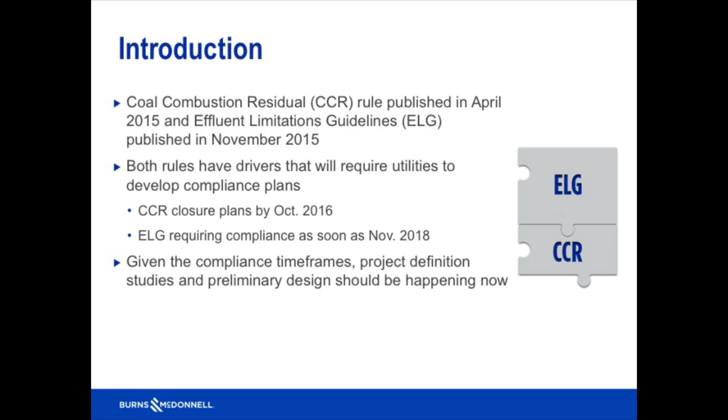The CCR rule was published in April of last year, and the ELGs were published in November of last year. Both rules have drivers that will require utilities to develop compliance plans: CCR closure plans by October of this year, and ELGs requiring compliance as soon as November of 2018. Given those compliance timeframes, project definition studies and preliminary design should be happening now, if not already started.

Just a couple quick slides on the rules. Effective January of this year, it applies to, quoting the rule, facilities where generation of electricity is the predominant source of revenue or its reason for operation. The two biggest issues, as we've touched on today, are that FGD wastewater discharge has very stringent limits, and ash transport water can no longer be discharged.

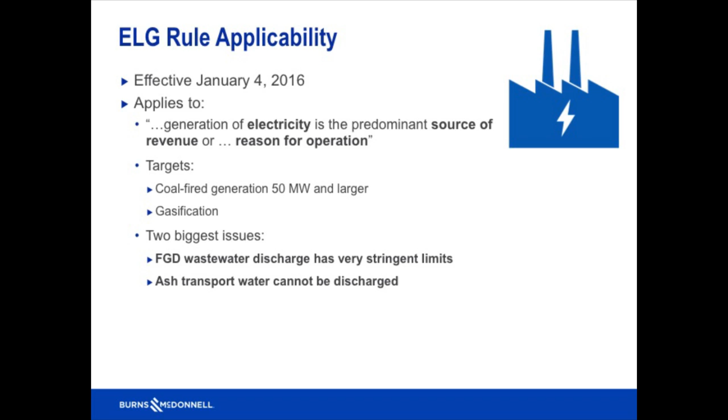Compliance schedule starts as soon as possible, beginning November 1st of 2018. They did put a backstop in of December 31st of 2023. It'll be implemented through facilities' NPDES permits, and your permit must justify your compliance schedule. It's important to note that legacy wastewater is not included, so any wastewater generated before your compliance date is subject to your old discharge limits.

CCR's rule was effective in October of 2015. It's a federal minimum standard, and states can be more restrictive. CCRs are defined as fly ash and bottom ash, boiler slag, or FGD materials. Each facility has to publish documents on a CCR website, and it allows for citizen suit authority for monitoring.

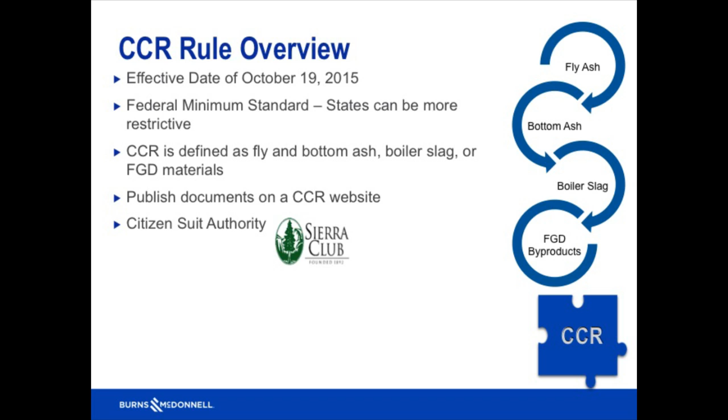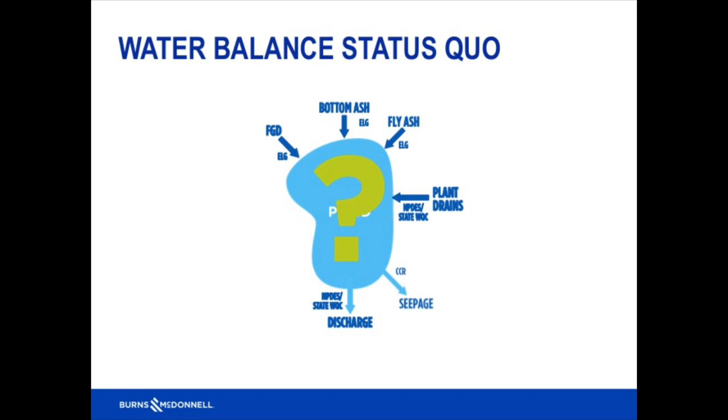So times are changing when it comes to water flow management at power plants. With those changes, it's never been more important for utilities to understand what their water balance actually looks like. Present day status quo, most sites have an ash pond or impoundment that all these drains are directed to. So if we look into the future, and those ponds are forced to close, what does that new treatment system look like?

Well, first of all, you're going to lose your ash streams through ELGs, as well as your FGD waste treatments. Waste streams will need to be segregated and treated separately. So you're left with just plant drains. Easy, right? Single line in, single line out. Question is, what makes up those plant drains? Short answer is a lot.

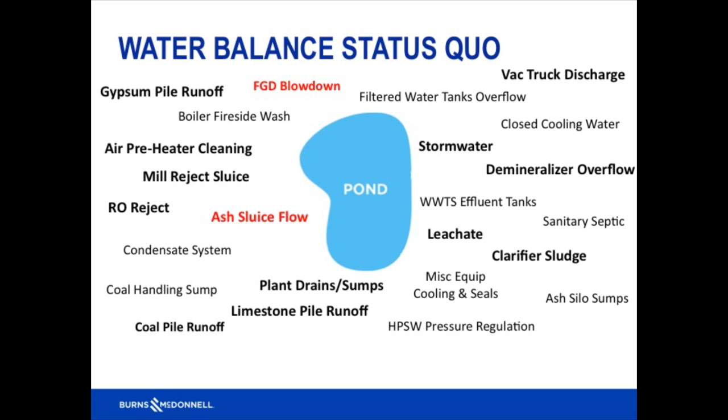This is a list from a site of everything that was directed to their pond. The two in red are the ones that go away with the ELG. Those in bold are streams that exist at most sites. Upon ash pond closure, these are going to need to be handled and treated in order to meet both existing and future permit limits. The new treatment options, which we'll talk about in a few minutes, will be much smaller than the ash pond, and with a shrinking process comes less operational flexibility.

For this reason, it's becoming very important to accurately characterize these flows and water qualities from these process streams. So how do you do that? Well, a water balance may be a living document, but most are out of date. In fact, it could probably be said that most water balances are out of date as soon as they're printed on paper.

So I'd like to take a few minutes and walk you through our methodology and process of helping clients update their water balance. We start with a plant survey. We take their existing water balance, and we sit down with operations and engineering to try to capture changes, modifications, changes made for operational ease, and any equipment that's now being bypassed.

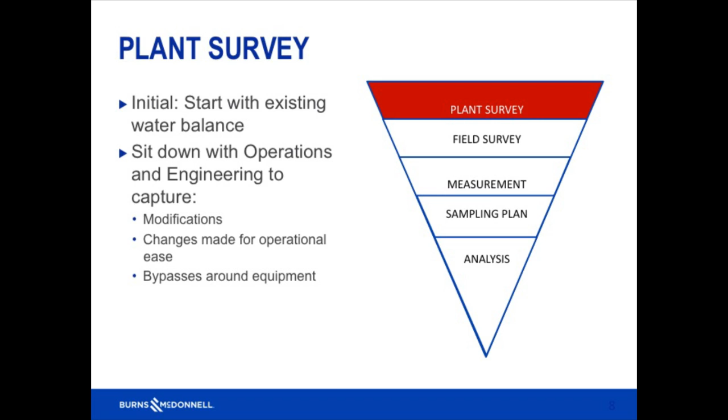We follow this up with a field survey. We go out to the plant, take the P&IDs and the water balance, and walk everything down. Are the as-builts correct? Are all of the sources identified? Are all of the users identified? Are all of the discharges identified? Then we look to see what kind of online flow measurement is in place that we can grab from the plant historian.

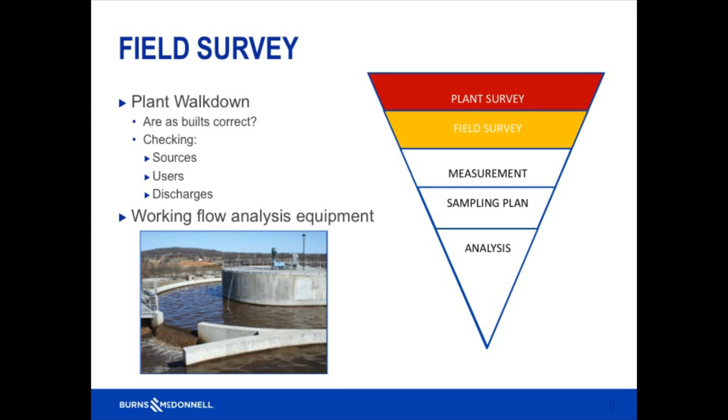Next step would be to try and measure those lines that do not have any flow measurement or intermittent flows. We do that with temporary flow meters and data loggers.

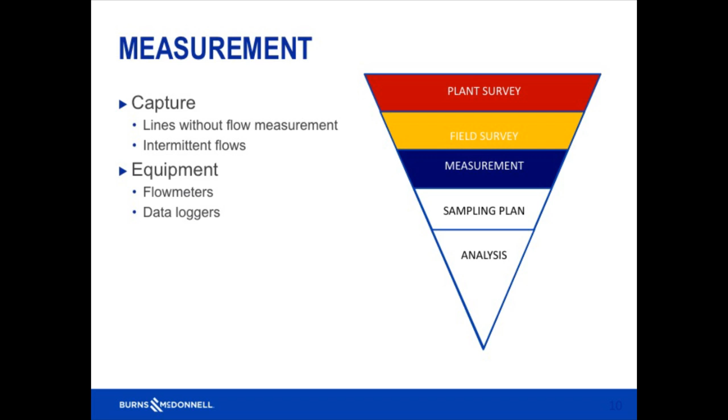We also have insertable magnetic flow meters. You need a 2-inch port, and we can slide this right in.

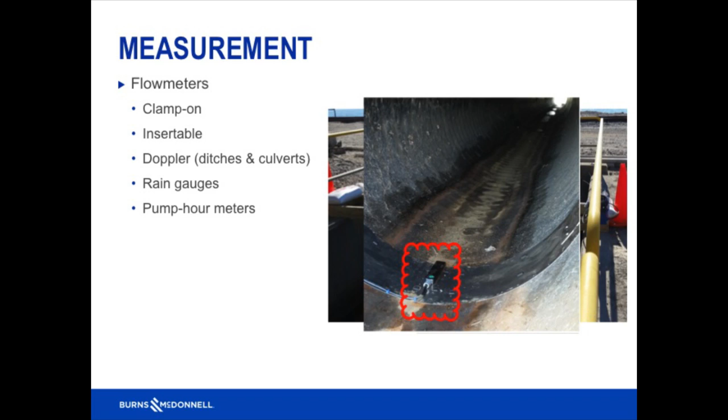We'll install rain gauges with data loggers to try and capture precipitation. And then the last thing that we'll do is

pump-hour meters. There's many different styles, but this is a simple meter that basically mounts to the outside of the pump and logs hours when it detects a magnetic field indicating that the pump is running.

And so then we use this in conjunction with pump curves to approximate flows.

So with temporary instruments come site-specific challenges. Some of the flows that you're measuring are out in remote locations and they don't have anywhere to plug an instrument in, and your instruments don't necessarily have a long battery life to last 2 or 3 days or longer while you're trying to get a good representative sample.

So this is an example where we have hooked up a meter to a solar panel to keep it charged.

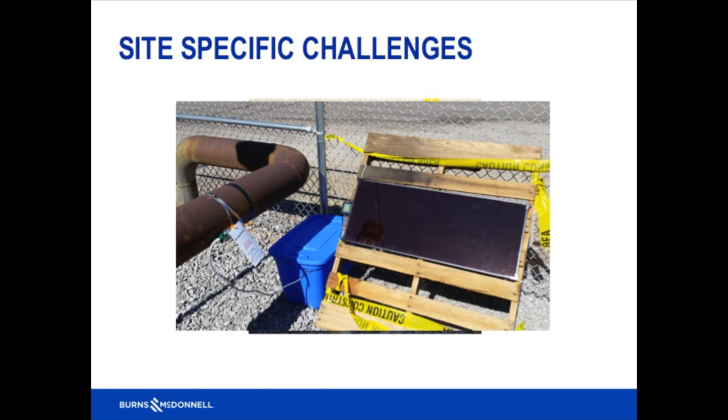So in addition to knowing the flows, it's also important to know what the water quality is. As part of this process, we'll develop a sampling plan. We'll identify key sample locations as well as what constituents we need to be analyzing. And then frequency is also important.

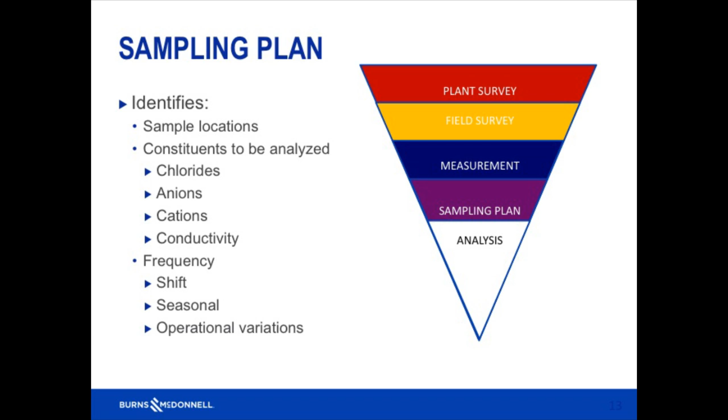Is it something that we need to monitor once or twice a shift? Is it seasonal? Is it something that, hey, if it rains for an hour or you get an inch of rain or more in a certain duration of time, do you need to go out and grab us a sample? And then we try to capture all the operational variations to the extent possible.

And so we take all this and we produce an updated water balance, and then we do some analysis. We try and identify if there are any areas where we can optimize the existing process.

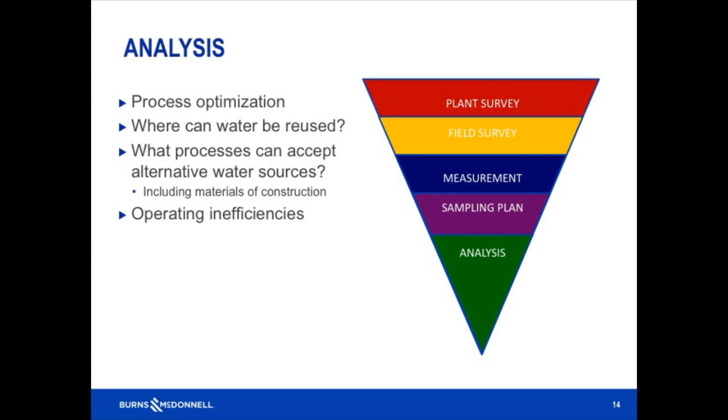Is there any opportunities for water reuse that aren't being exercised? Are there any areas where you could be using a different makeup water source? Obviously, that you'll have to factor in existing materials of construction and compatibility, and then try and identify any operating inefficiencies.

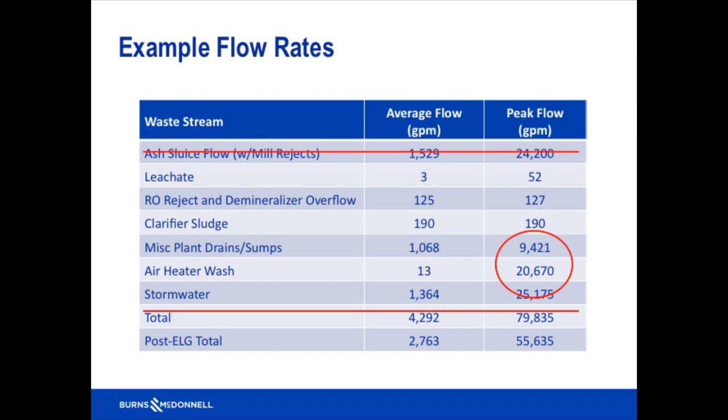So what do you do? First option is you do nothing. You continue sending it to your impoundment under the premise that your pond isn't going to trigger any of the closure criteria within the CCR, which are dictated by structural integrity, safety factors, groundwater monitoring exceedances, or location restrictions.

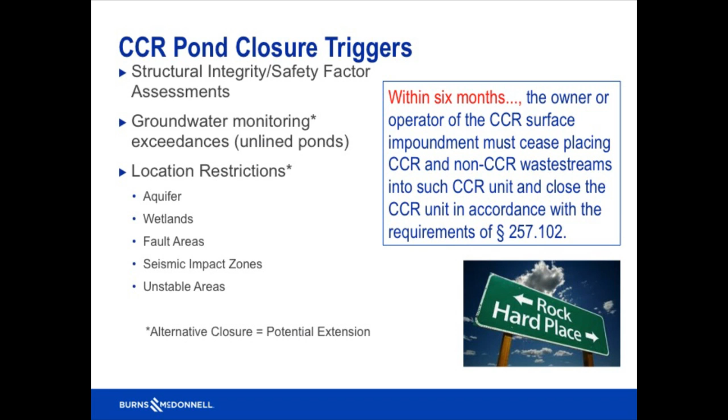Now, if you do trigger a pond closure, then you suddenly cut your timeline, and you have a very short window to try and add a new treatment system.

So your second option would be, let's install a new process wastewater pond. Here's a picture of a new pond.

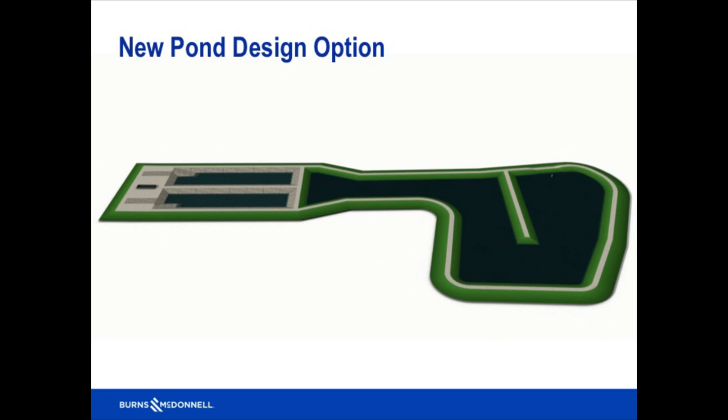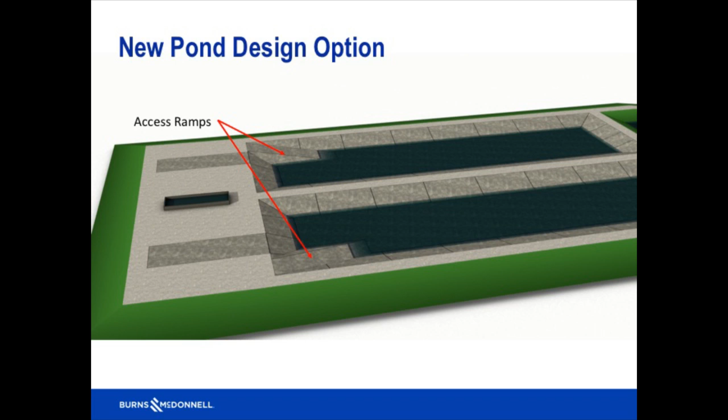You can see we've got an inlet mixing chamber. These are your primary settling compartments, access ramps, back unloading pads, and then into a secondary settling area and your outfall.

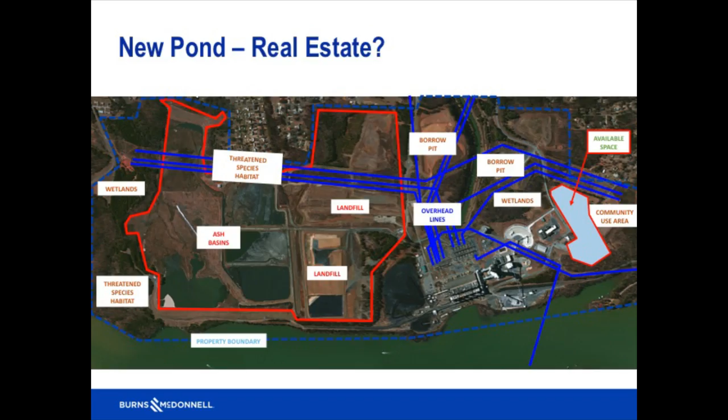So I don't have the real estate for a new pond. What's my next option? The next option is to convert to a tank-based treatment instead of a pond.

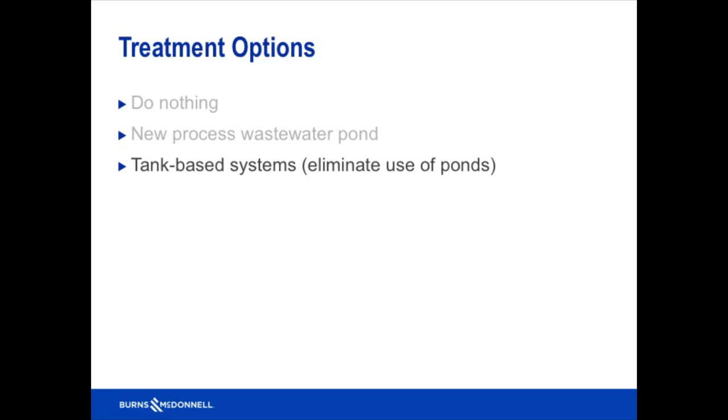So we'll take the example of a 60-acre contributing area for stormwater runoff. We don't have to worry about our FGD flows, they've already been segregated. And we'll put this plant in the upper Midwest.

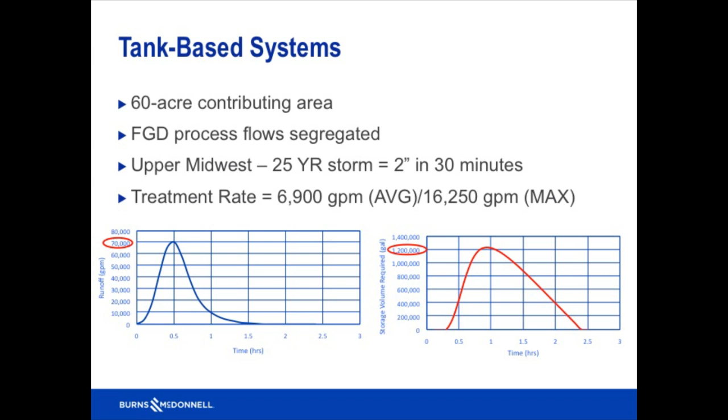So in a 25-year storm, we can expect 2 inches of rain in about half an hour. So that means my peak stormwater runoff is about 70,000 gallons per minute. So I'm going to design my system for an average flow rate of 6,900 GPM with a hydraulic max of just over 16,000, which means the storage I'm going to need is about 1.2 million gallons to cover that storm surge. So here's a layout of a tank-based treatment system.

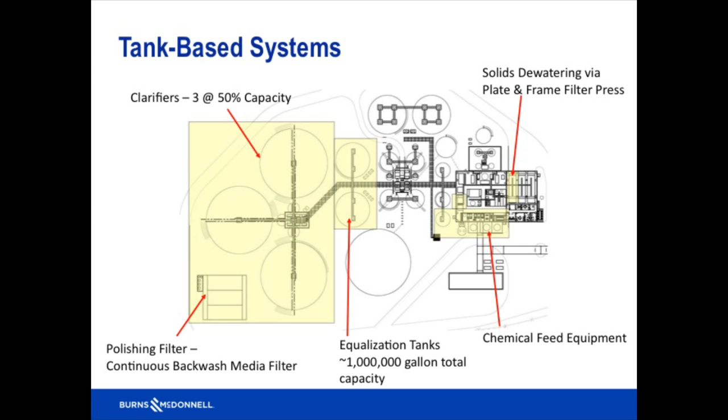Maybe. So I've got equalization tanks, and I've got 1 million gallons worth of storage. Oh, but wait, I just told you I needed 1.2. So your other 200,000, we're going to assume can be covered within existing sumps, existing process tanks. Otherwise, these will have to grow slightly, obviously.

We'll do a 3 by 50% clarifier configuration. Those are the 3 large tanks to the left, since I can't get the arrow to show up. There they are. Those are roughly 120 to 125 foot in diameter.

You may need, depending on your metals permit limits, some polishing filters, and then you'll have your ancillary equipment, chemical feed. Odds are you're going to have to take your pH up to get rid of your metals, which means you then have to bring it back down in order to discharge it. You'll have some coagulants, some polymers. And then you'll need sludge storage and a method for solids dewatering.

Keep in mind that these are for average flows. If you're running through your hydraulic max, your performance may take a bit of a hit.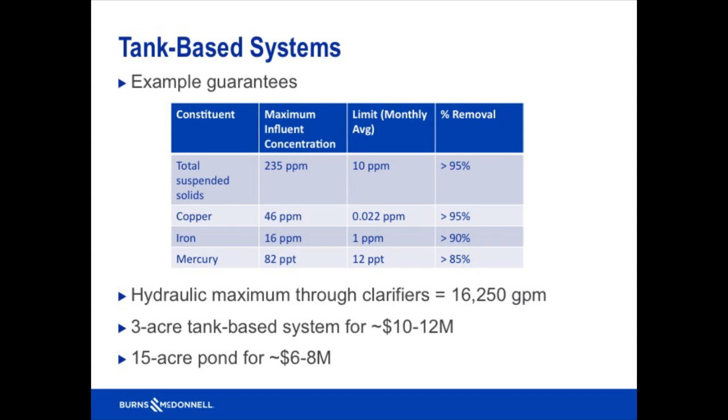Relative cost and area: you need 3 acres for this tank-based treatment system, and it'll be a $10 to $12 million capital investment, as compared to 15 acres for a new pond at a 6 to 8 million capital investment.

I guess I'll end with kind of where I started, with the compliance timeframes. Utilities really need to be kind of in the process of determining what comes next, with regard to not only FGD and their ash, but also with their remaining plant drains. And I'll take any questions.